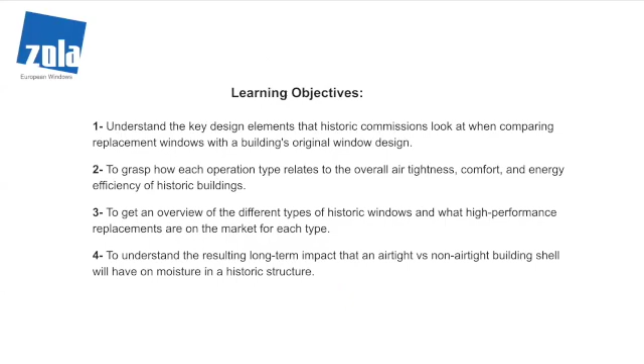Replacing windows versus repairing the original is kind of a debate that goes back and forth. The traditional approach of let the building breathe versus passive house. It's nice to see that there's an education and movement in the community towards understanding how these old buildings work better and better, the building science behind it. So the most important aspect here at the bottom is that draft stack effect in old buildings has an impact on the structural integrity of old buildings.

So the more humidity in these changing conditions of old buildings, where we have steam showers and air conditioners in the summer, the more movement of air you have through the building, the more that moisture makes its way towards a dew point and can actually cause damage in the upper portions of the building. You see this when you start to take apart the old buildings and you see mortar damage and the top 4 or 5 feet of the walls starting to fall apart. You might think that it's just rain damage, but actually it has to do with moisture as well, moving up through the house and finding those cold surfaces during winter, condensing on that brick, condensing on those joist pockets, and starting to degrade it over a long period of time.

So our wet interior environments need to be more controlled. As you shut down the stack effect in old buildings, you actually prolong the life of the building, as well as reducing its energy usage and creating a higher level of interior comfort for its occupants.

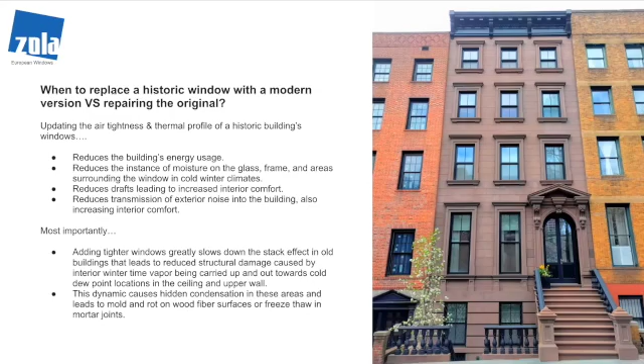Casements are much more difficult because the lines are much thinner, and it's hard to work performance into the thin glass to glass lines. But I also get across my desk a lot of steel replacement and some mid-century modern, which are very complicated to try to retrofit to high performance depending on where they're located and what the passive house design criteria is for the outside conditions.

So what are the key aspects of the conversations over the last decade I've been having with historic commissions on what they're looking for and how we design our windows to match what they're wanting to see? The five are, if you've done passive house in historic, or if you've done any historic windows, pretty obvious.

But the key is not just the glass relationship to the opening and how much the percentage of the area is, but the design lines and any of the glass to glass relationships for frame that actually crosses through the opening. It's kind of like the historic casement windows. What is the glass to glass for those? And then also the horizontal bars for the simulated double hungs. The most difficult one is requirements for operation match.

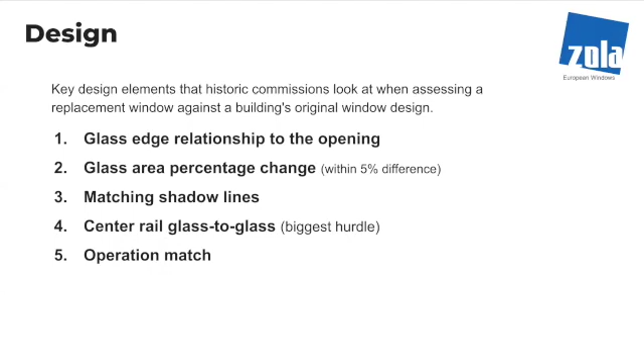Step one, with any replacement, is of course assessing the rough openings for a project. But when it comes to a landmark building, the more important aspect is to actually locate the glass edges within that opening, because the Landmark Commission is looking to keep with the fabric and balance of the facade for the original intent. So that means matching the glass percentages and locating the glass percentages within their actual openings.

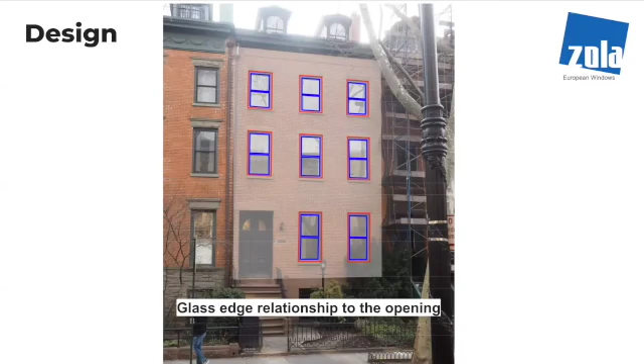It's not so complicated, but this is an existing condition of single pane glass submitted to me. This is actually my background. This is the section that was submitted. So it's a big project, White Street, and this was given to me and they're like, can you match this? And at first you look at it and you're like 1 1/4, 5/8, 2 3/4.

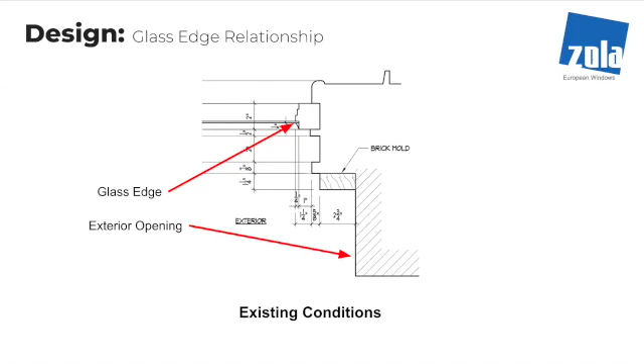This is actually an iron building. So the cross hatching of the structure, there is literally physically iron window to window. There's a post, and so there's almost no wall. It's an actual steel iron building. So it was a very tight condition. But ultimately, once we started to look at what the glass edges were in relationship to the exterior opening, we realized that our window did in fact fit within an eighth of where they wanted to be, without having to make modifications to our unit.

And so after going through maybe a couple hundred or more landmark projects and doing the same process over and over, there's never been a case where we couldn't fit or match the glass exterior opening relationship. The reason is because traditional windows have a weight pocket embedded in the wall, which causes this very thick 2 3/4 to 5/8 plus 5/8, this very thick cavity that is required.

Replacement windows from like the 1960s and on had spring balances, and they have other methods to hold the weight of the glass when you're lifting the window. But traditional windows have the weight pockets, which we take advantage of in implementing the high performance aspects.

So one thing I do want to point out between the existing single glazed and the triple high performance passive house replacement is that actually the interior finish line does change. It does move outward away from the glass. So even though on the outside you do have a very close relationship match to what the existing condition is, you will need more space on the inside when it comes to finish returns.

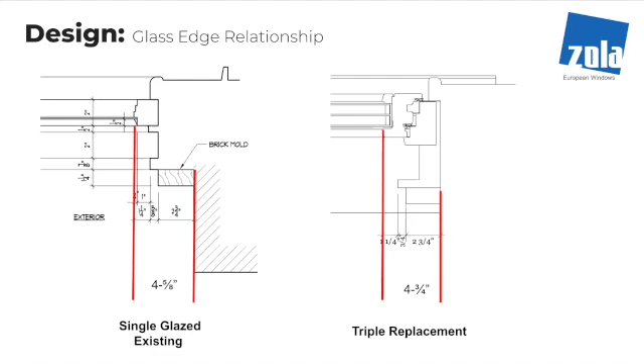That actually often is the most problematic part of a project, especially where they're wanting to keep the interior louvers. If there's an opening louver with pockets, oftentimes they want to keep and not renovate or install new louvers. But what happens is, in fact, you have a new interior finish dimension, and those actual panels no longer fit, or it's very precise. It actually takes a lot of design work down to the eighths of an inch to get that to work. So there is a lot more design work to look at on the inside.

The next item is, of course, shadow lines, and that is the aesthetic step back and the lines as they move from the opening back towards the glass. And on the left, you can see that there's a 2 3/4 by 1 3/4 brick mold with a 5/8. And as those steps take place, landmark commissions and replacement windows, they want to see these same like cake layers as it moves back to the glass.

So for the brick mold and the simulated rail system that we install on the right into our simulated double hung, we can definitely match brick molds and reveals or get very close to it. You can see that they have a 5/8 on the left, but we have a 3/4 from our back. We can start to match those as they step back, but the actual physical window and the actual glass reveals, we're much more limited in what we can do with the actual operable portion of the frame versus what we apply to it to simulate the actual historic.

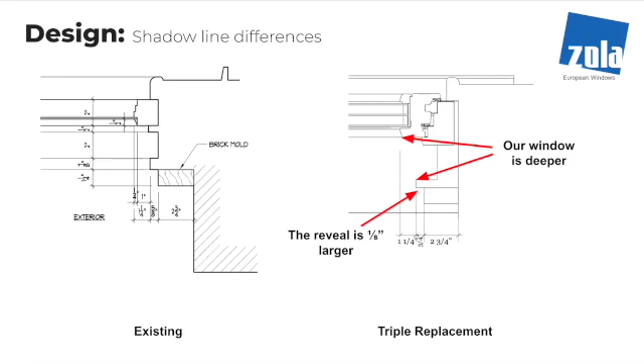But you can see from what we've done here, you can get extremely close, and actually the finished conditions from the street level are almost imperceptible. Meeting rail and the crossbars or vertical bars with casements, those are actually much more difficult. So we get a lot of windows that come our way, and they're telling us that the wood piece is 1 inch, and the glazing bead is 1/4 on each, and so we're getting 1 1/4, 1 1/2 inch, or 1 5/8, and these are usually often huge windows.

So to start off with, historic windows often have used a much higher quality wood than what we have available to us today, a much more stable, a stronger, a tighter grain, old growth. We're actually not able to work with those type of materials currently. There's just not a lot of those type of trees left. And so the structural aspects of the material we're using requires us to actually include more wood. Otherwise, we don't have longevity, we have warpage, and we have movement.

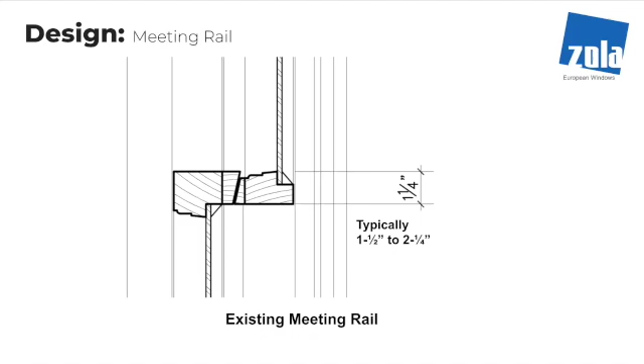So, I'm gonna move my screen here. So you can see, even though on the left they say 1 1/4, it's actually more like 1 5/8, because of the bottom piece included for the glass. So we're more than that, but we're not too far off. And so this is one place where the glass percentage gets impacted.

So we actually do have a slightly larger meeting rail when it comes to our simulated double hung, but it does stay within the 5% of the original glass percentage that they're looking for. And in all cases, the detail on the right has been accepted by landmark commissions for all projects. We've never actually run into a problem with getting this cleared with New York City or any other region.

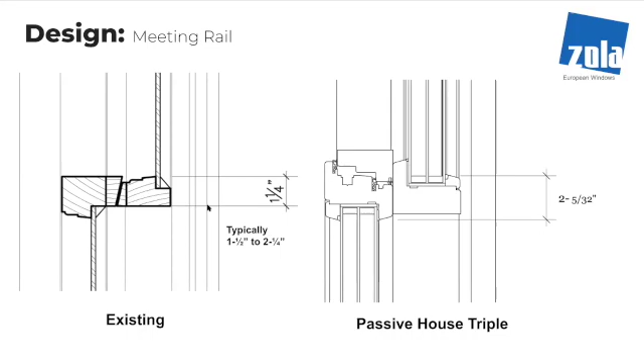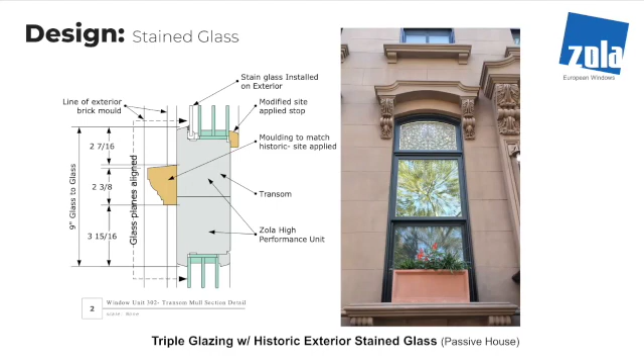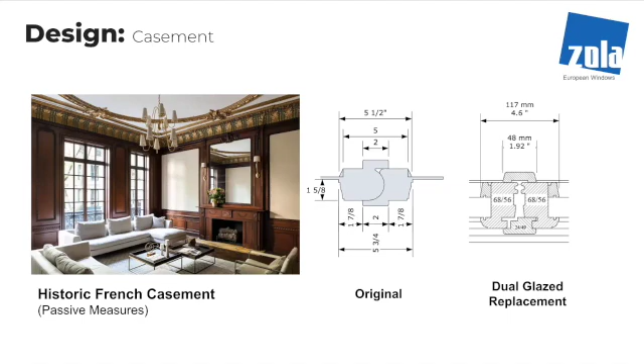And that goes the same with steel windows. We get a lot of requests for steel windows. And the problem is that steel windows often come with a very, very thin, this is an aluminum window image, but we often get an operable to operable casement of like 2 inch to 2¼ inch, a request that can you match these steel dimensions?

The answer is yes, you can match it if you build another steel window, but the moment you start to put thermal isolators into the frame, the steel window starts to get thicker. And if you actually are trying to do performance or near passive house, what you find is that a steel window with the thermal decouplers inside the frame starts to approach aluminum window dimensions.

And at that point, the cost of steel, which is like 2 or 3x that of aluminum, makes no sense if you're trying to hold dimension. And so the dilemma with a steel window that has like a 1 inch frame with a little bezel, and by the way, no gaskets or anything, and a single pane of glass, is that when you go to replace those, it's probably got to be replaced with a much more robust window that can actually fit a gasket, can actually have some thermal decouplers in the frame, and can have at least dual, if not triple, for New York City. That doesn't fit into 2.5 inches.

This detail I have here is one of the thinnest aluminum frames on the market. You can see on the right that the fixed version is 1¼ inch outside dimension to glass, but the operable version is 3 1/8. And if I even bring fixed to, it's 3 3/4 minimum to do an operable to a fixed. An operable to an operable is much bigger. So steel retrofits and the operable dimensions are really problematic.

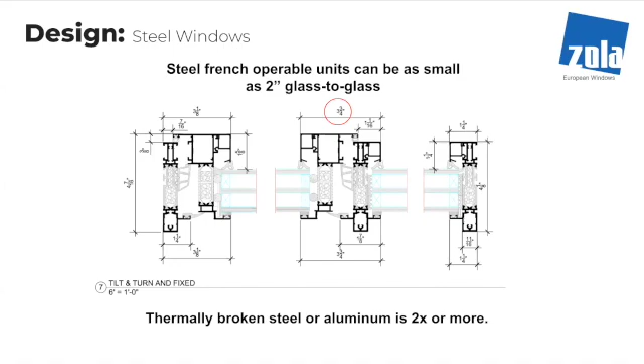And part of that problem is thin versus thick. There are demands for very thin frames and tiny dimensions that have no insulation and very little structure. And if we're to make long lasting windows of high performance with insulation, then we have to go thick. Our default passive house glass for New York City is a 48mm triple R11. And often that nearly 2 inches of glass is thicker than the actual window frame we're replacing.

So to implement performance, let me just talk about glass for a second. For those who don't necessarily understand what thin triples are, what thick triples are, why the performance, why can't you fit R11 and R15 into a thin, where's vacuum glass? There's a whole lot of items out there. For an argon glass, dual 5.26 versus triple, which is an R11, you need about 16 to 18mm for argon to be optimal. If you go below that, your argon's performance starts to degrade, the performance of the window degrades, and it gets too thin, at which point you need to upgrade to a krypton gas.

Krypton gas is better in thin spaces. Argon is better in thicker spaces. And so as you get thinner, you certainly could increase your performance by switching gases and increasing the noble gases, but your prices go up quickly for the glass. So if you can fit the higher performance 48mm glass into your window and design around that, then you get the best performance at the best price to match the design. And that's the sweet spot that we work in with high performance passive house.

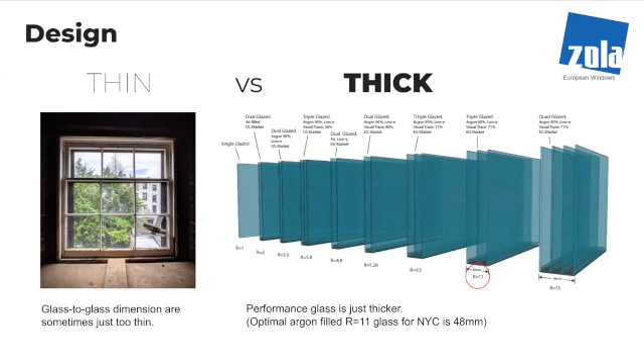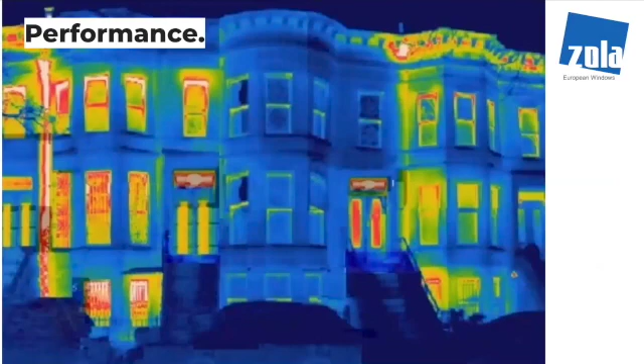So, all right, coming into conclusion, performance. I've sat and watched so many performance presentations when it comes to Passive House. But ultimately, it comes down to one thing when it comes to implementing performance or getting a higher quality window, and that's that it's airtight. Dual glazed airtight or triple glazed airtight, it doesn't matter. That's one of the biggest reasons why high performance historic buildings have to transfer away from the double hung, because double hung windows are not airtight.

The biggest component of building efficiency is reconditioning incoming exterior air and the loss of the conditioned air out through the shell, and that cycle of air moving in, through and out, and the amount of energy it takes to recondition that space. Once you implement air tightness, which is the key component of Passive House, you start to see dramatic gains in building efficiency, regardless of the U value.

Choosing to go with an equivalent or slightly less U value in a window that doesn't have air tightness, a double hung and or crank casement without multiple glazings, multiple gaskets and multi-point lock system, it's going to really impact the interior comfort of the building as well as the thermal performance and efficiency. And so that in and of itself is the biggest thing.

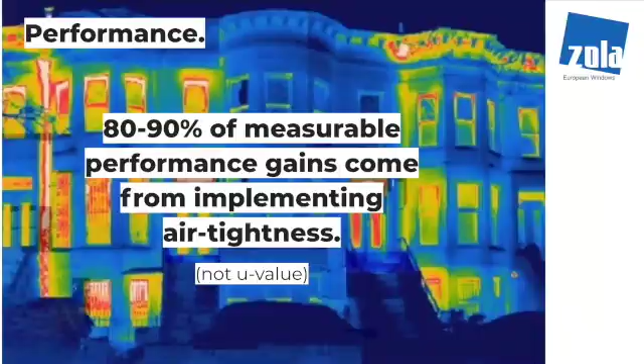And so I'm leaving this, that's the end. I have a worksheet I'll show you just after that, but I kept it short and sweet because I actually think that answering direct questions is really key, especially in this project by project, because there are not 1, 2, 3, or 4 types of historic project. Each project in and of itself has its own really specific details.

But what I wanted to also show you is a worksheet that we've created to help you work through your opening detail and to help you understand how historic or simulated double hungs can fit into it. Let me switch screens real quick. So I have created a worksheet that I work with because people always ask me over and over to do the same task. And so when I get the same request, I start to make them a shortcut to do it.

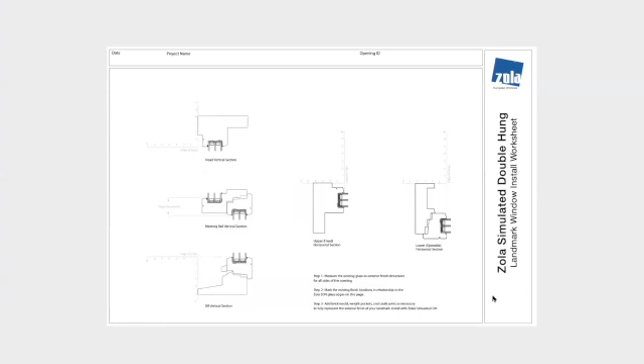Take control. See if I can zoom in on this. Hold on a second.

All right. So the first step in actually establishing the window and the opening, as I said before, was figuring out where the glass edge relationship is to your opening. And here in this center upper fixed horizontal section, what I've done is I've actually zeroed out the face of the frame and the glass edge as your datum starting point. And so if you take your existing condition and measure your glass to your existing masonry opening or exterior opening, you can then take this tool and measure back away and start to make that line and get an immediate reference for how our frame fits your existing condition.

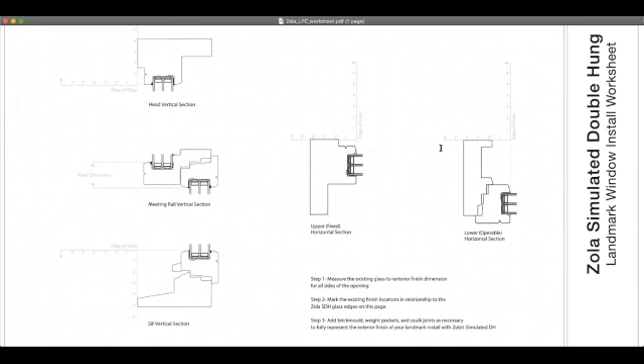What's usually the case is that we're sitting probably 1/4 to 1/2 inch just behind your masonry here in New York City for almost every single situation. So our frame is probably about, like I said, 1/4 to 1/2 inch wider or prouder than your masonry opening and exterior condition is, which puts us slightly into the shade pocket.

Oh, I couldn't see it. You could see it, but I couldn't see it. Sorry about that.

So you can see I've actually inserted it. And this person, which is a recent project, was actually looking to fib a little bit and wanted to get a little bit more glass and kept squeezing me. So they said, please make it 1 inch. And I was like, yes, but it's 1/2 inch. You know that, right? And he's like, yeah, just draw this 1 inch. But I just want to point out that once you establish the masonry opening of the exterior condition, you then can establish the brick mold, the spacing, and the shadow lines leading back to the glass.

And in nearly every case, you get extremely close to existing condition for historic windows in the double hung configuration there. And you can see here on the left, the head vertical, their condition is actually 13/16 larger than what we have. So there's plenty of space there. And that brick mold then comes up and covers that as well.

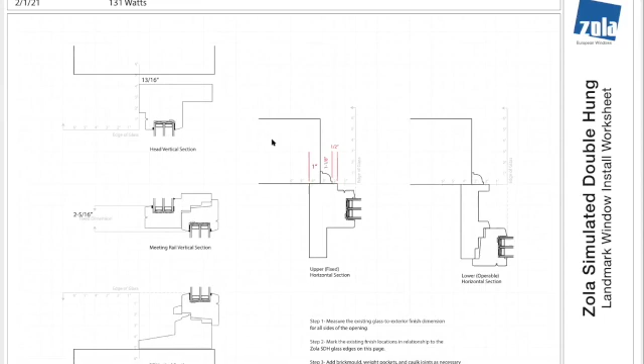But if you ever needed some assistance when it actually comes to working it out, we have this quick worksheet where we can throw your dimensions onto our window, so you can get a feel for how your historic conditions need to fit to achieve high performance Passivhaus. And with that, short and sweet, I'll open it up to questions if you have any.

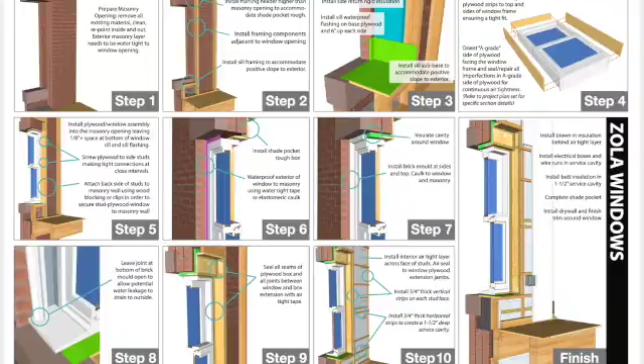Have you done a unit where there is a single pane on the exterior, then a cavity space for an integrated shade or not, and then the actual triple pane glass within a single unit? Yeah, we do not do that product, but that product is available from a lot of other European manufacturers. The glass is actually integrated into the cladding area. And in fact, that has different types of venting, because this allows for that heat gain to be trapped in that cavity just behind the glass.

In the wintertime, when it's heated up and you want to have it for the heating on the inside, you can vent it to the inside. But in the summertime, when you don't want it, you can vent it to the outside. I've seen plenty of those. They're very popular in Germany and Northern Europe. But we, as Zola, rarely get that request. And I don't know of anybody who's distributing that window in the United States, unfortunately.

What is the U value for the simulated triple glazed double hung? The U value for the simulated triple glazed is in the, I should know this off the top of my head, but I don't. The glass is R11, the frame is in the 5. It's like in the R6, 7-ish. I can send you the spec sheets on it. Unfortunately, I don't have it memorized because I'm dealing with like 20 products at a time, and I don't have my performance table open. But I have spec sheets that I can send you, and I can actually do some math and performance for specific sizes to help you with that as well.

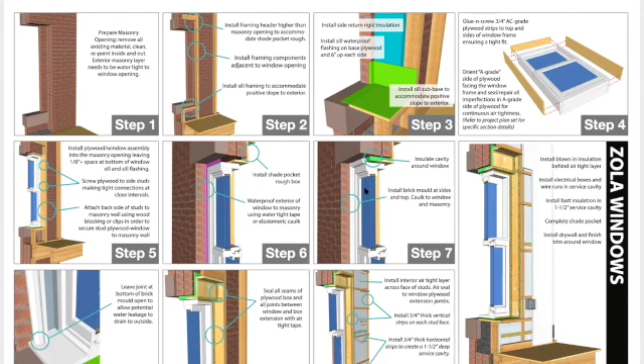So that is true. This does not have that exact flashing install, but I've seen it done about 2 or 3 dozen different ways, and I actually think that there are best methodologies for different installation systems, and there is no one size fits all in that case. But I will revise it to include that in step 3, just because I don't want to be embarrassed next time.

If you equip a tilt and turn with insect screens for the operable sash, how is that removed to wash the fixed upper sash on the exterior? All of the screens are installed from the inside. There's a series of clips around the perimeter that wrap around the outermost gasket. So they're very easily installed by just holding it in place, dropping it down, turning a couple buckles, and it's in. The same is for pulling the screens back out for washing and cleaning the windows as well.

I frequently pull the screens out of my previous tilt turns and wash them in the bathtub with the shower wand twice a year, because New York City is kind of gross. Exactly, it's important to be able to wash those screens, of course.